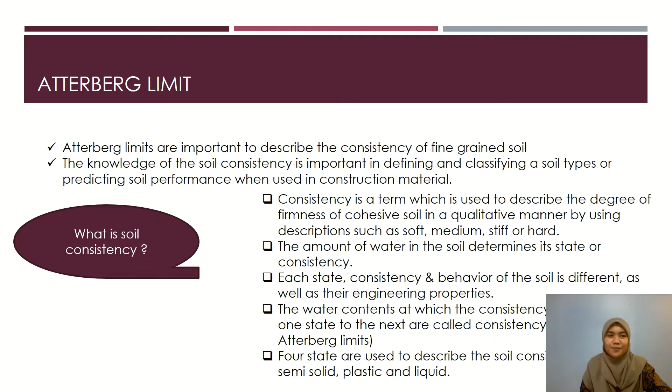So what is soil consistency? If you look here, this is water content. So when we add water into the soil, from solid, the soil can change into semi-solid. It can also change to plastic. And the last one, it will become liquid based on its water content. Okay, so we can conclude that depending on water content, soil may appear as solid, semi-solid, plastic, and liquid.

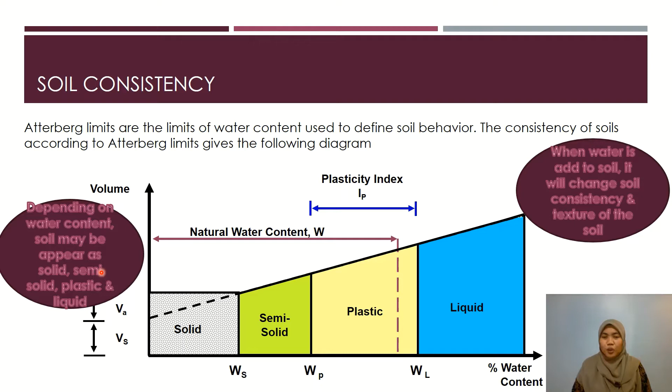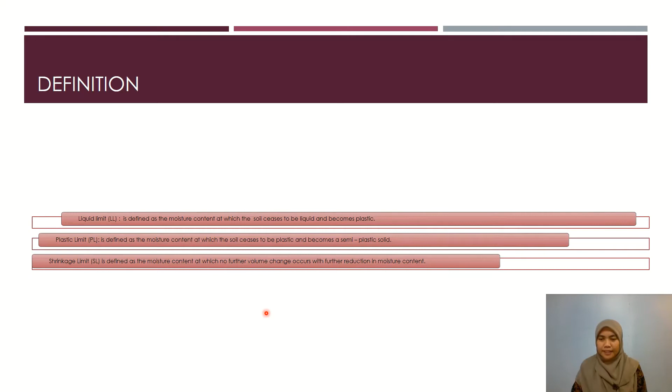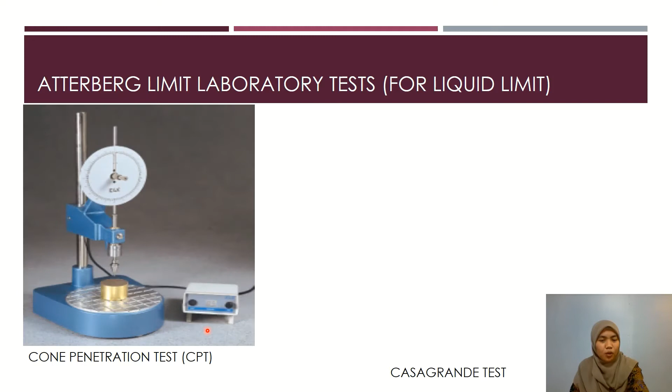In the lab, we have two different types of testing to determine our liquid limit. Either you use CPT, cone penetration test, or the second one is the Casagrande test. So here is the picture to represent both tests. The full procedure is already shown in the video. So in my slide, I just explain a simple procedure for how to conduct both tests.

For CPT, first of all, for both tests, we need to make sure that we use fine soil, and the soil must be passing 0.425 millimetre size. Okay, then the fine soil must be added with distilled water. We put distilled water and we mix the soil together until it becomes a homogeneous paste. After that, we put our soil in this cup.

And then we place the soil on the base. This is the cone, so the cone is lowered so that it just touches our soil. Make sure that the needle is at 0 value, and then the cone is released to penetrate the soil paste for exactly 5 seconds, and you can record the data.

You can record the data of penetration value and take an amount of soil for the moisture content determination. You need to remember that for CPT, the liquid limit occurs at 20 mm penetration, but since it's difficult to nail the exact water content required to penetrate 20 mm on the first trial, several attempts are made. So in the lab we conduct at least 4 to 5 tests.

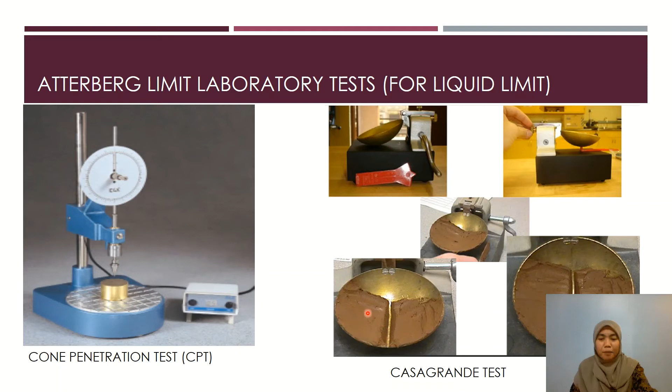Then you adjust the height, and then using this crank handle, you rotate at 2 rotations per second until the soil comes into contact at the bottom part. The distance where the soil comes into contact is around 13 mm. And then take an amount of soil for the moisture content determination.

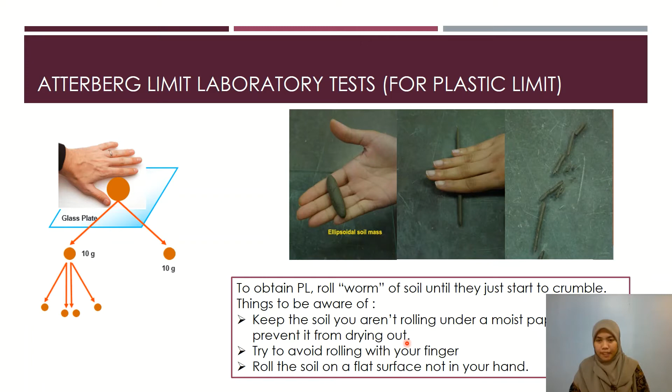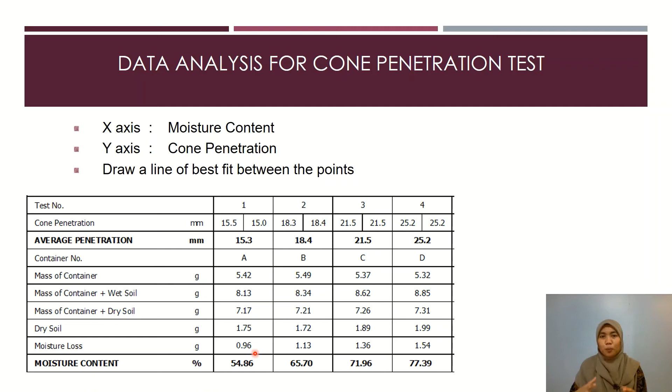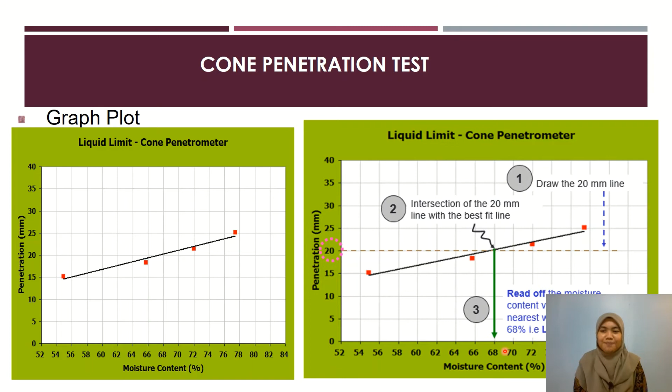Next we move to the Casagrande testing. For Casagrande testing, we will use a log graph to plot later on. But for the data analysis, same as CPT, you need to measure the mass of container plus wet soil taken from your cup, and then put it into the oven. After 24 hours, take it out, weigh again the container plus dry soil, and then calculate the dry soil and moisture loss.

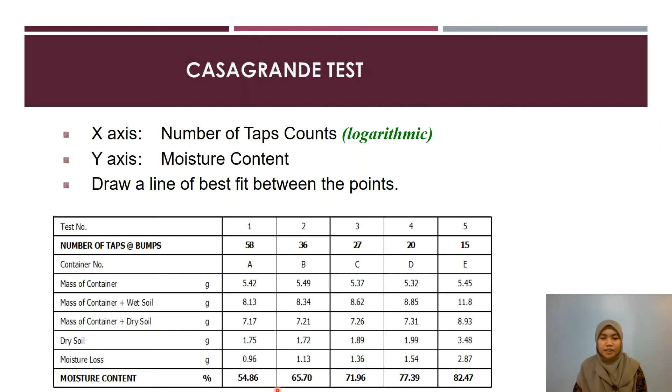To determine your moisture content here, use the formula: mass of water divided by mass of solid times 100. Don't forget to times by 100. After you get all the moisture content values, then using our log graph, we need to plot your value of moisture content versus number of taps.

Okay, for the liquid limit in Casagrande testing, the liquid limit actually occurs at 25 blows, or 25 taps. So here at 25, drag off the value until it touches your best fit line, and then read off the moisture content value to the nearest whole number. So here is your liquid limit for Casagrande testing.

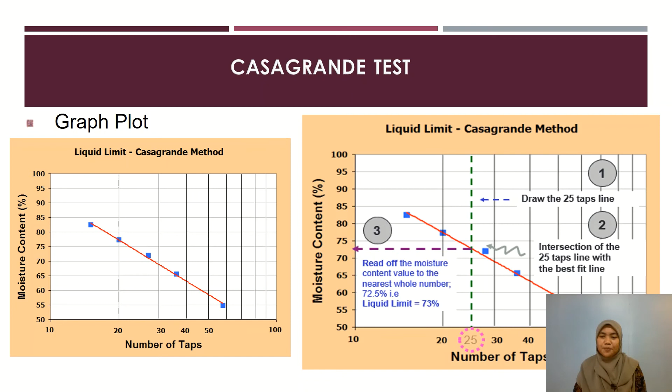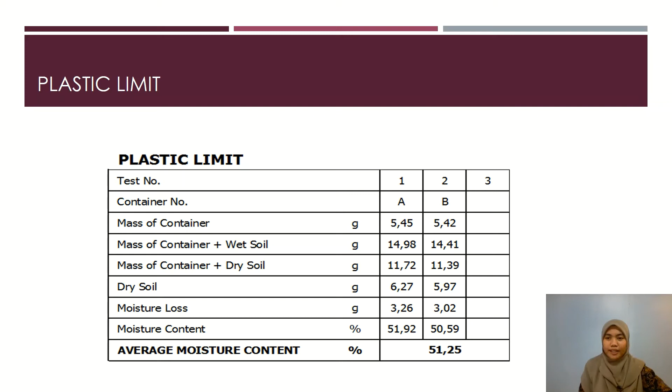So now we move to the plasticity index. So what is plasticity index? The difference between liquid limit and plastic limit is actually your plasticity index, or we note it as IP. Okay, so after you find your LL and also your PI, what we should do is classify our soil. You need to remember that our main purpose of this testing is actually to classify our soil.

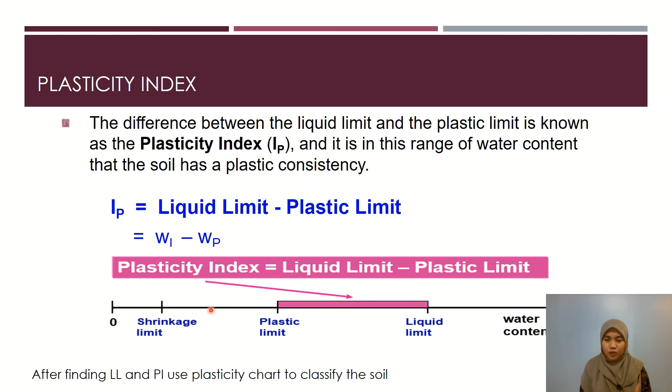Either our soil is clay or silt. Okay, so we use this chart, which we call a plasticity chart. This line splits or divides clay and silt. On the upper part is clay, so we have CL, CI, CH, CV and CE. C represents clay, and M represents silt. L is low plasticity clay, I is intermediate plasticity clay, H is high, V is very high, and the last one, E, is extremely high plasticity. The same goes for silt. L, I, H, V, E is the definition of each name.

Okay, so how to read the plasticity chart? How to classify our soil? I'll give an example. Let's say your value for PI is around 40%, and your value of liquid limit is 60. Then you drag your values of 60 and 40, and where they cross each other, it's here. So it means that your soil is CH. What is CH? CH means clay of high plasticity. So this is how you name and classify your soil types. Hopefully you understand how to classify your soil types.

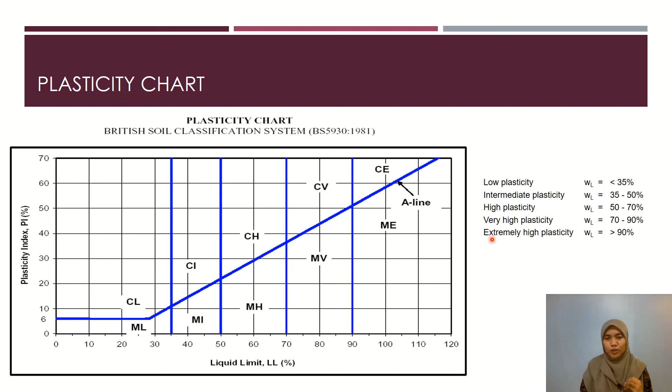In this slide, I would like to explain liquidity index. What is liquidity index? It is actually a measure of soil strength using Atterberg limits and the relationship to the soil's natural water content. IL comes from this formula: W minus WP divided by IP. W is the natural water content, WP is your plastic limit value, and you divide by your IP. This is very important because we want to study the strength of soil based on Atterberg limits.

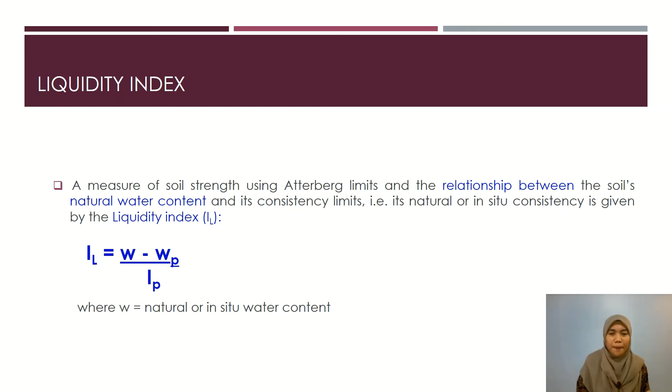So why do we need to study liquidity index? Because as engineers, we are very interested in the strength and deformation of materials. So we can associate specific strength characteristics with each of these soil states. At one extreme, the liquid state, soil has the lowest strength and the largest deformation. At the other extreme, the solid state, soil has the largest strength and the lowest deformation. So when we get the value of LI, we can determine our strength based on the LI value.